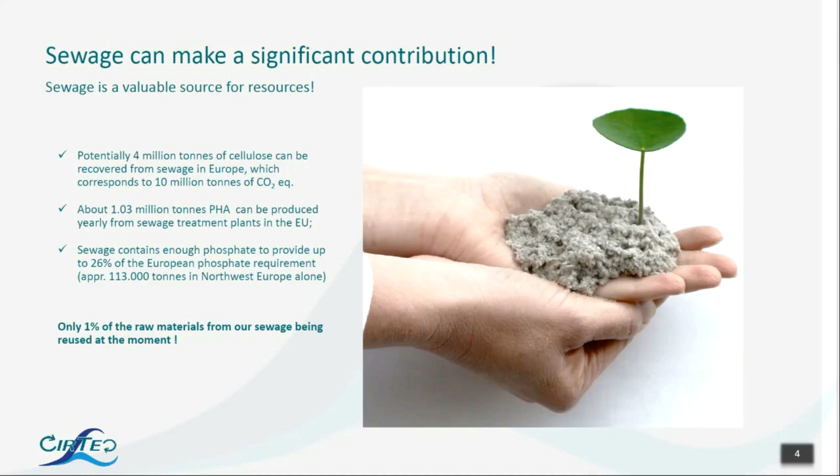To put it in numbers, I don't want to bother you with all the numbers in this sheet, but here you can see that Italy is, in Southern Europe, the largest consumer of tissue paper. The tissue consumption in Europe is about 9.6 million tons. It does not all end up in sewage, of course, because we use it for all kinds of other things. But about 6.5 million tons ends up in our sewage system and comes up at the sewage treatment plant. From that, we can recover approximately 4.5 million tons of material.

Tons of material doesn't say too much to a lot of people. So if you would make a kind of calculation, we're talking about something like 14.85 million trees a year that we could save. And if you compare that again, it would compare with a forest of 29,700 hectares. So a lot of forest.

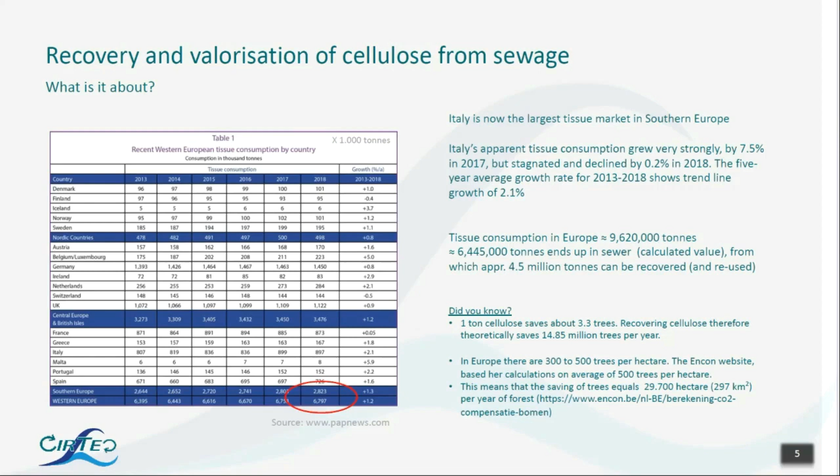We didn't come up with the idea in the morning of, okay, we're going to harvest toilet paper from sewage. Basically, the idea came from a contest from the Dutch water authorities, where one of the water authorities came up with the idea that sewage contains more energy than it will take to purify it. So theoretically, you can produce energy while treating your sewage. From this idea, we started to sieve material from sewage, and in the first stage looked at making biogas out of it as a first step to produce energy.

Our first customer put this material that we sieved under a microscope, and it proved to be a majority of toilet paper. As a kind of commercial thing, he printed paper from it, and that started the idea of recycling toilet paper from sewage. So we started to harvest material by sieving influent from a sewage treatment plant, and we built a couple of large-scale plants as well, because the first material had about 60% of cellulose in it, and we thought, okay, this is a marketable product.

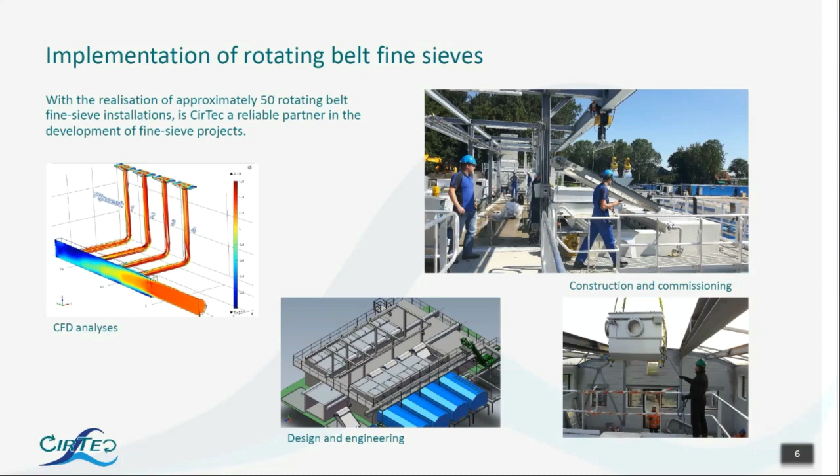With implementing new technology at the treatment plant, if you do something new, you answer one question and you get about a dozen new ones. So we had to do a lot of research at all kinds of scales to see what the impact would be downstream on the treatment plant.

Well, if you look at what the impact would be by sieving your sewage, you will find that you consume less energy. You take out carbon, so the energy consumption for aeration, but also due to less sludge production, will be reduced by approximately 15 to 20%. As I mentioned, you produce less sludge, so you have less waste, and with less sludge, you consume less polymers.

A nice side effect is that we take out all fibers, but we also take out a lot of hair, so it's reducing your maintenance cost. And next to that, you have the opportunity to harvest a marketable material. If you look at the average composition of the material that we harvest in the Netherlands, you can see that it is 65 to 75% cellulose. You see fats, sand, proteins, and all kinds of things in it.

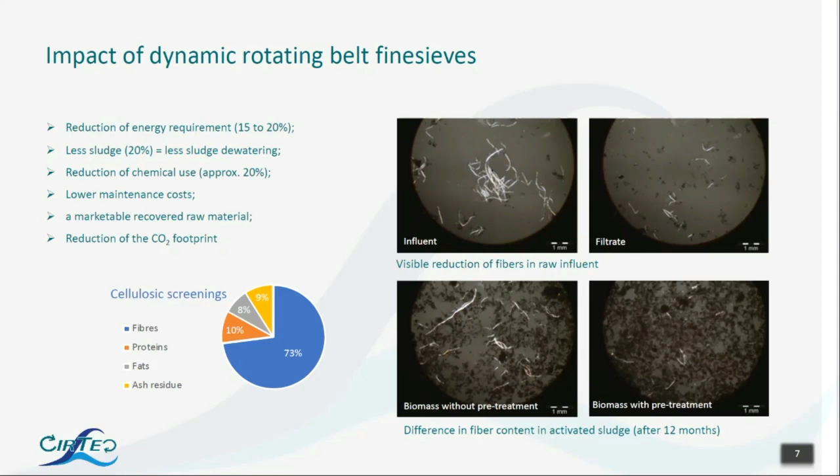And I added some pictures of the biology where you see that you have less fibers in the biomass present, so the activity of the biomass increases, and you see some pictures of filtrate. So what do we do? Inline, we now separate a residual stream, and in the second stage, we take out the cellulose.

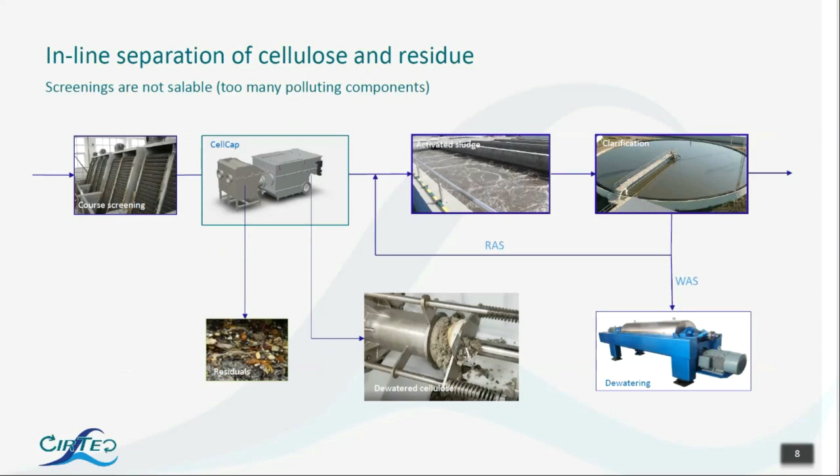So without additional pumping, behind coarse screening, we install a two-stage filter system, taking out these materials, where the residuals, as we call them, still have quite an organic content, so you can make biogas out of that. But the cellulose, and for those present, I have some examples here. This is cellulose harvested here from this area. You can give that a second life.

So if you look at it from a perspective, we sometimes compare cellulose harvesting with sieving influent, but it's not the same. We really take out in two stages, first residuals, then cellulose, the marketable product. And again, it lowers the load on a treatment plant and reduces the energy consumption. And again, you have a marketable product, and we developed some markets for that product.

So all the cellulose that we take out of sewage treatment plants ends up in a high-end product. For example, we sell it to the asphalt industry, we use it for bio-based chemicals, we apply it in biocomposites, bioplastics, and we have a certified product as insulation. Again, we have here some examples of biocomposites if you want to see them, but there's really a market for it. The demand for our cellulose is much higher than what we can produce nowadays.

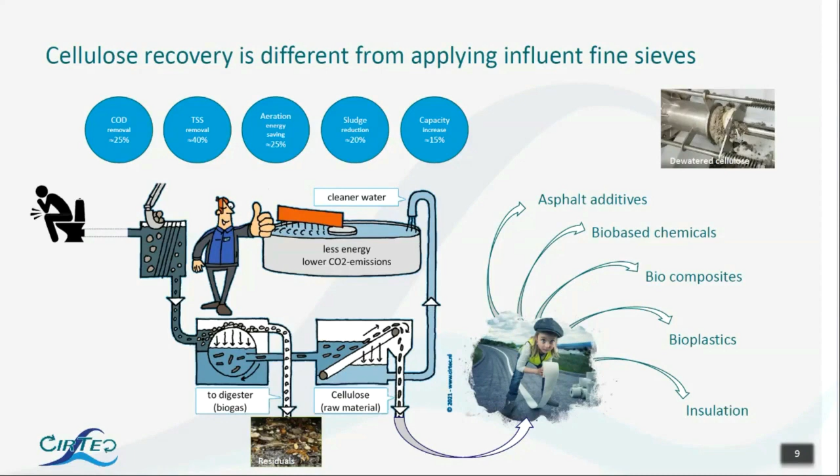Just to give you an impression of where we started: as mentioned, we started by sieving material, but then taking out different components took us a long way, because synthetic fibers are about the same shape as cellulose fibers. Hairs are smaller than cellulose fibers, but first you have to get them out. So we went through a long route.

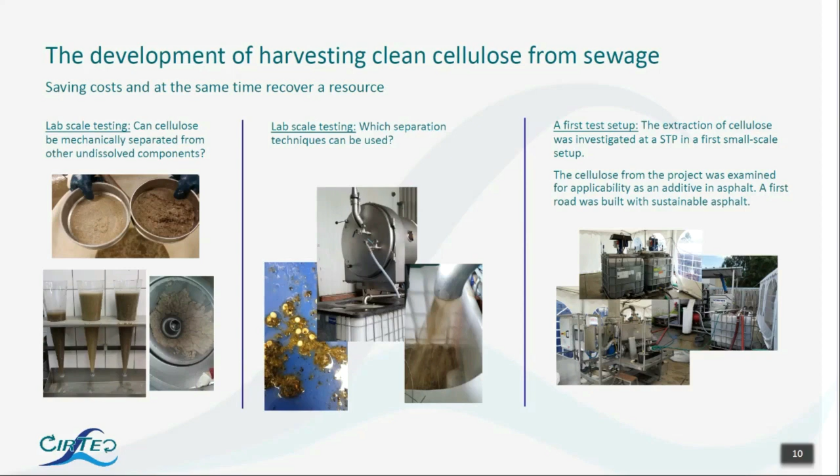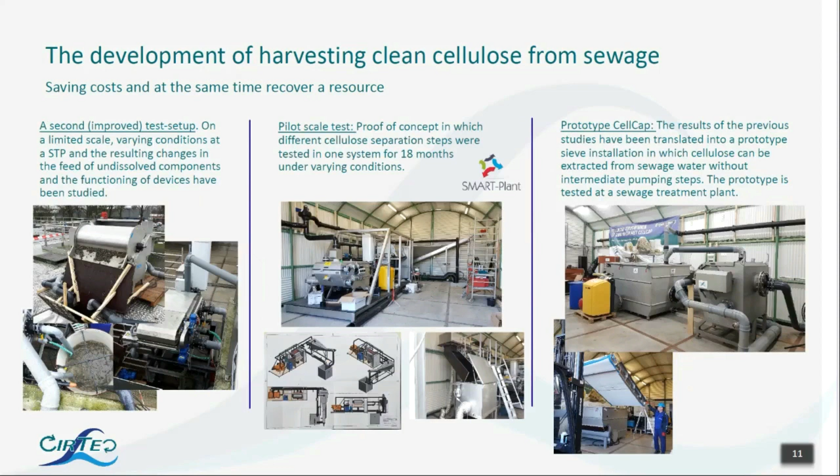Sorry. We started in the laboratory, doing all kinds of tests, manual sieving. We built all kinds of setups to go through a research program, built first some larger scales, did tests with that, built larger scales, and nowadays we have it up and running, proven technology at full scale. So harvesting cellulose each day, operating machines, and selling it to the market.

Then again, if you do something new, you get a lot of questions. And from this perspective, we also looked at the life cycle analysis. A German consultancy company, Kompetenzzentrum Wasser Berlin, looked at the life cycle analysis of our technology. And at first, you have to establish the baseline for the life cycle analysis.

So we took the treatment plant where we have installed our technique. It's a 300,000 population equivalent system with grit removal, coarse screening, then biology. Sludge is dewatered with a centrifuge, then transported to a dryer, and after that it's co-incinerated.

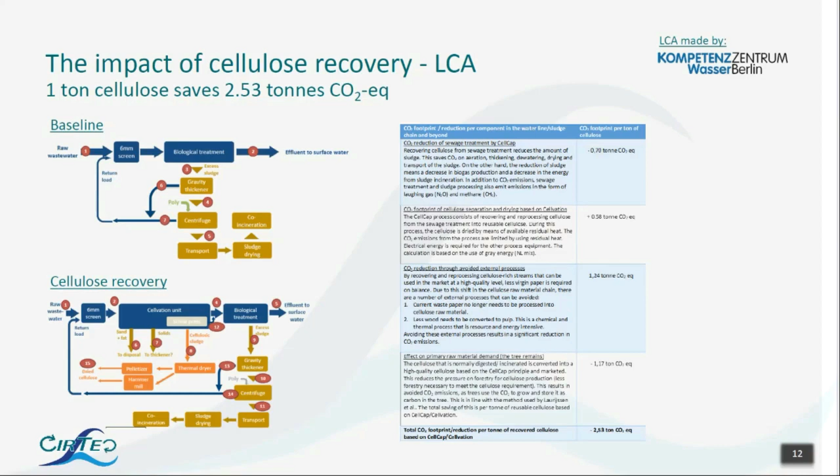In the next stage, we put in our technology and we looked at the different steps in the process. So at the treatment plant, you have some savings. It is here, I think, about 0.7 tons of CO2 per ton of material that we reduce. Of course, you bring in material and you have some additional energy consumption, but also in the value chain, we reduce the CO2 emission. And if you would take it as an average, each ton of Recell, which is the name of our product, saves you approximately 2.5 tons of CO2.

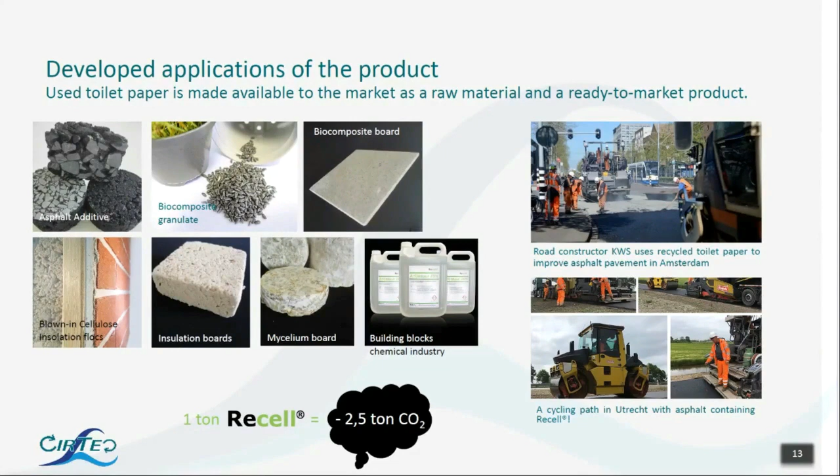Then some examples of products that we make. As mentioned, we sell it to the asphalt industry, which is nowadays the biggest market. We sell it as a stabilizer for that. There are two reasons to go to that market. It's a little bit further away from direct human use. But besides that, we also developed together with producers products like biocomposites and biochemicals. As mentioned, we have a certified material for insulation, and we really sell it.

Then some other topics, because doing this, I would say that as an entrepreneur, you should be a little bit crazy to go into these kinds of developments. One of the issues is, I would say, the legal aspects around reusing material coming from sewage. Basically, if you extract the material from a waste source, the material that you harvest is a waste. And we deal with it differently in different countries, in different regions. So as one of the previous speakers said, value chains don't end at the border. This is something that is really important.

Theoretically, we have to go in every country for every final product, again, through an end-of-waste status. And the procedures are not the same. So you have to reinvent the wheel again and again. To give you an idea, in the Netherlands, it took us about 4 years to come to a level where somebody said, well, this file is quite complete. So we did not get a decision on it, but the file was complete. And we've already been going for that for about 6 or 7 years.

Something strange happens here also: if we would get it in the Netherlands, then we have a product. I can transport it over here to Italy. I can sell it to you all. But making the same product in Italy has to go through the same process. So besides technological developments, we really have to make some steps here.

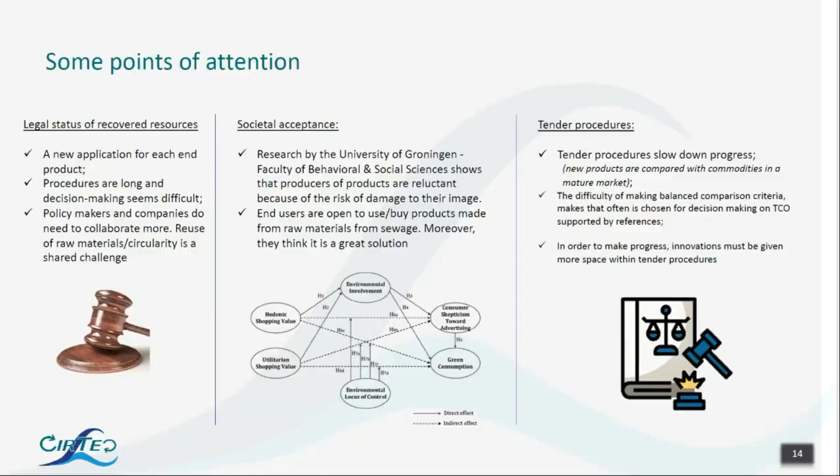So don't misunderstand me, it's not a complaint, but I think that technology companies and those who are involved in procedural matters and the legal status of things have to cooperate in this to understand it in the correct way and to make the right decisions, because as one of the previous speakers also said, getting into circularity is something that we all have to achieve. It's not a problem of them or us, it's our problem, and we really have to make some steps into this. So this is, in short, what I would like to talk to you about.